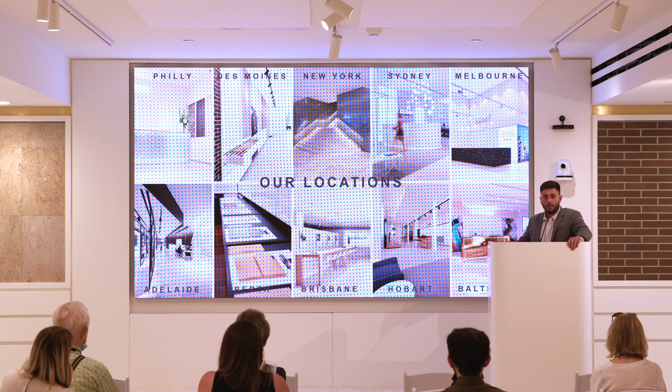We have 10 design studios across the world, 4 in the United States and 6 in Australia. Philly, Des Moines, New York, Sydney, Melbourne, Adelaide, Perth, Brisbane, Hobart, and Baltimore are the 10 that we have currently across the world, and New York Design Studio is the flagship studio of the world.

So a little bit about the New York Design Studio. This is the global flagship, as I said before. It's 16,000 square feet across 3 floors. As you could see when you first walk in, we have over 10,000 glass bricks, imported from Venice, Italy.

The first floor is for event space, and there's also some chips. You might have seen the drawers over there, so a lot of our products that we have on display, we carry chips as well for architects to take with them for future references for their projects.

The second floor, which we're on now, is another showroom, and it's used for bigger event spaces, something like this. We had our grand opening in March, with over 300 guests, so we can hold over 500 between all 3 floors in the studio.

We host over 300 events per year in our design studios annually. These include architectural speaker series, they include lunch and learns. We have a lot of talks where we have architects come here, similar today with Ed Lippman, where they talk about where they get inspiration for their projects and the insights they have for future ones as well. So we love to host events here.

We have 2 bars in this studio alone. We do a lot of drinking. We have a great time here in the studio. We learn about brick, so a lot of events here in the studio annually.

We have over 700 products here on 5th Ave, including products from 10 US plants. We also import brick from Italy, Germany, Australia, and other countries as well. So we do have all of our products here on display in the drawers behind me and to my left. Please feel free to take a look inside those drawers and see what we got going on over here.

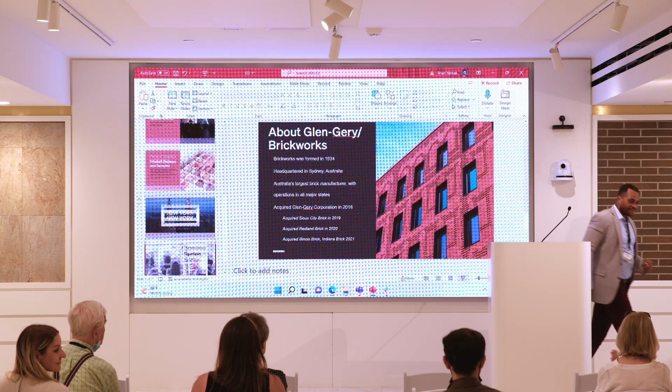Thanks very much, JP. It's very nice to be here, to be invited by Brickworks to come and give a talk in New York. Who wouldn't want to be here? Sydney is a long way from the northern hemisphere and from New York.

And I first came here luckily as a 15-year-old accompanying my mother, which was a great opportunity to experience the scale of a city like this. And that led to my return here after studying at the University of New South Wales in Sydney to get the opportunity to work in Marcel Breuer's office in New York.

As I was saying earlier, at that time in 1979, architects were becoming very preoccupied with postmodernism, a reversion to historicism. Modern architecture was not the fashion of the day. So when I returned to Australia, I was very much out of step with the prevailing sentiment. But I looked for a contemporary modern architecture, something that would inform my approach to design, and I discovered that as a 21-year-old on Madison Avenue, up the street from here.

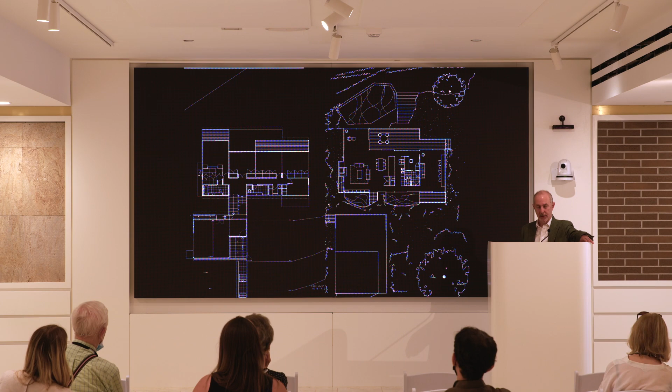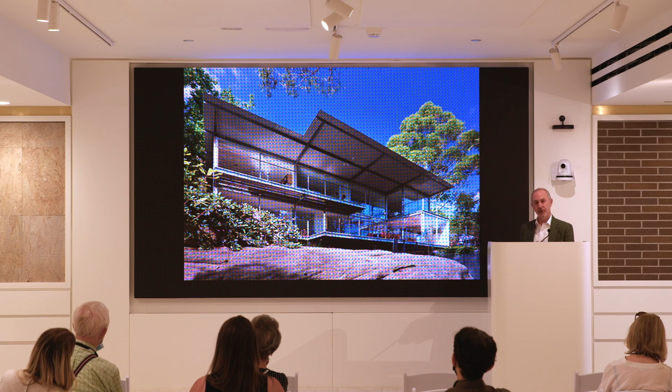Tristram Carfrae is a well-known structural engineer who designed things like the Water Cube. He's currently refurbishing and rebuilding Gaudi's church in Barcelona. But this was his house in Sydney, and as you can see, it's in the national park, facing north, the sunny aspect, a building that reaches out into the landscape. There's a casual quality to these kinds of houses - they look to the north.

The views are to the north. The landscape is natural, indigenous. The landscape designer employed on this project is well known in Australia for harnessing indigenous planting and natural vegetation. So although this house is not far from the centre of Sydney, it has a quality of being very much part of the natural environment.

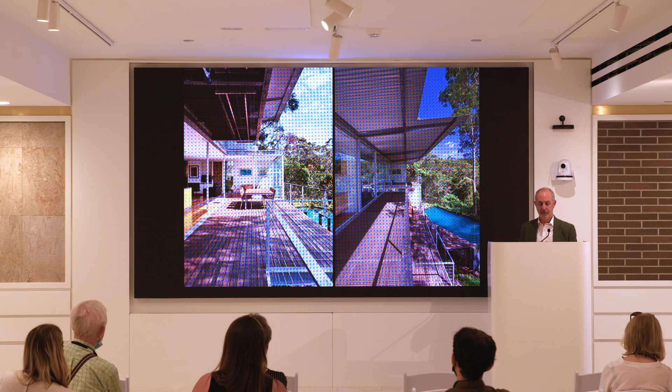Working in the city, though, is a very different thing. Sydney is blessed with a wonderful natural environment, thankfully, because arguably the built environment hasn't been as complementary to its setting as it could be.

There were also some quite eccentric clients roaming around Sydney with a certain degree of affluence. This was a project commissioned by one of these property developers, a Chinese businessman who told me he wanted a house with no corners, no straight lines, and Chinese feng shui, the belief that energy needs to flow through a space and not be trapped.

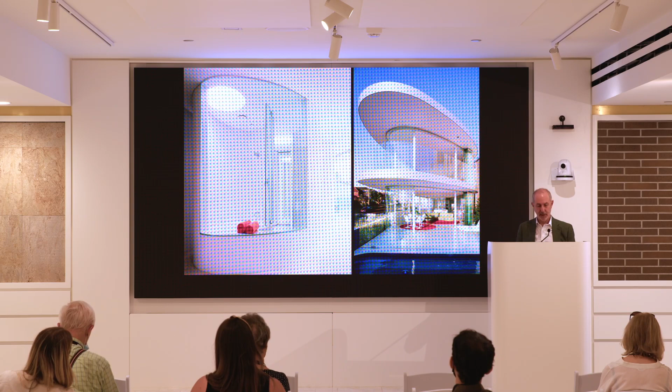It's concrete, so it has more thermal mass than the other projects, but it's a steel frame, and the glazing is positioned to allow views to the west, sun and warmth from the north, and also a natural ventilation system which allows cool air to rise up through the building and out through the roof terrace. You can see at the top of the stair there's a louvered venturi that allows hot air to escape.

So there was a history of residential architecture. By this stage, I was commissioned to do some more public work, and I guess working at a different scale provided greater opportunities.

This is a site very close to the Harbour Bridge in the oldest part of Sydney, known as the Rocks, the most historic part of Sydney, full of sandstone terrace houses. This project, a community centre, sits on a very narrow sliver of space abutting the expressway which leads to the Harbour Bridge.

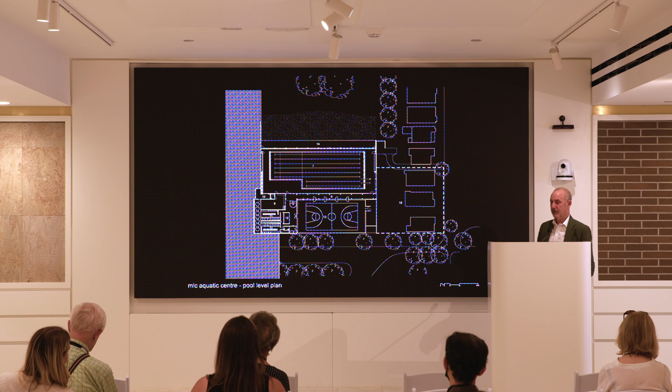Their brief was that they wanted a water polo pool and a learn-to-swim pool, two separate swimming pools, but what we did was combine the two pools into a single body of water: a 33-metre pool plus a 15-metre pool. We created a 50-metre pool which did both, and that was a very good investment for this school. You can see that the school encompasses architecture which goes back many years.

European settlement in Australia is not as old as it is in other parts of the world, but this school's about 120 years old, and we thought that the prospect of adding new building stock needed to respect the old. So we established certain rules about how the new related to the old, and there's no problem with new architecture, but there should be some relationship between older buildings and newer buildings.

Often that's to do with vistas between them, not blocking views between old and new buildings, and the relationship between the siting of the old and the new.

Once again, the opportunity of natural light and natural ventilation was extracted to the fullest. You can see that the building is open to the north, which is the sunny side in the southern hemisphere, and sun comes in from there. It can bounce off light-coloured surfaces, so the building doesn't need to be artificially lit. Also, cool air at low level, rising, and extracting hot air can be employed.

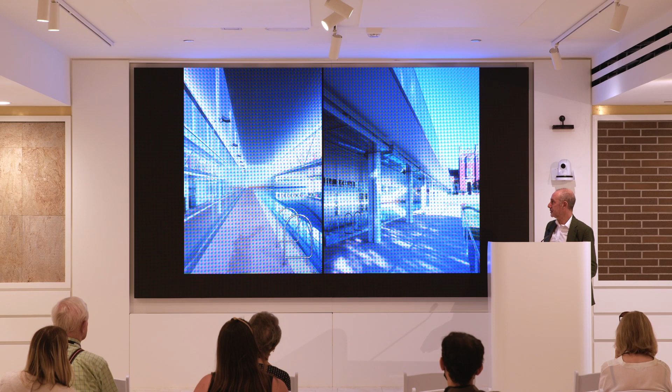So from there, there was other work to do at this school, and I'm sure the situation in America is very much the same, but in Sydney in particular, which we'll talk about later as a global city, there's a huge pressure on private schools to provide better facilities and more innovative facilities.

So we had a client here who was a very forward-thinking school principal, and she sent me to a place called Reggio Emilia, which is in northern Italy, where we started to understand how children learn and the whole philosophy of educating young minds to think.

Although this is common parlance in educational circles, there are very few school principals who would actually entertain the idea of an open plan environment. We looked at the work of Richard Neutra, who had done similar things in California, the Corona School in California, but she wanted to build a school where there were no walls separating children.

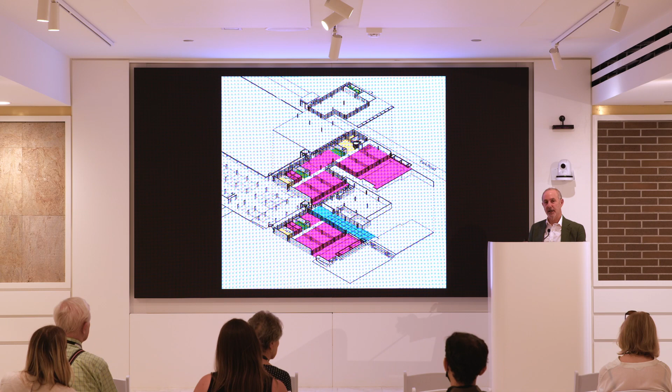And the concept of classrooms, we changed the word classroom to studio. Her management board were quite concerned about that, but we created rooms that could be subdivided if they had to be, or they haven't had to be, but learning spaces which look to the outside of the building, as well as outdoor learning spaces where children could lie under a tree with laptops and learn in a natural setting.

Then this is a sketch of the other idea, of course, that schools are miniature cities. They're cities for small people. And there's what we call a piazza in the middle of the building, which provides space for outdoor learning.

It's a place where people who arrive can congregate and have a coffee, parents who drop their children off. And then there are smaller spaces and more intimate spaces. This idea of different scales within a building is very important for children because it provides them with an introduction to what the world outside is like. There's a lot of learning that takes place outside, not inside.

There are different opportunities that exist for internal spaces, but this idea of seamlessness means this facade can be completely opened up so that the internal space can become external space. And most times of the year, in that climate, that's quite possible to do.

It's a 3-storey building, so there's a car park at the ground level and vertical circulation, and what became a theme of the practice is to make that a delightful experience. Moving up and down a building, moving horizontally and vertically through it, becomes something enjoyable.

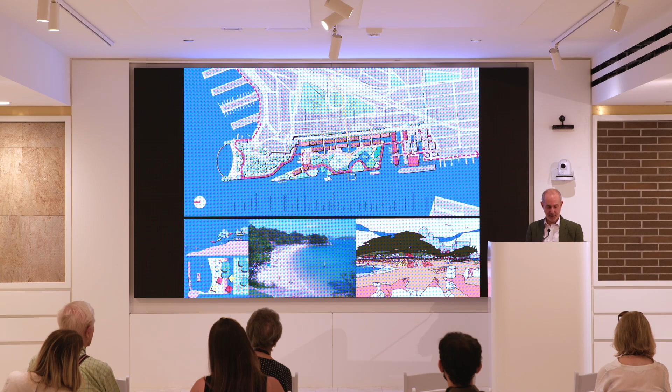So Sydney still is, even though the population is expanding and the density is increasing, very much an outdoor city where lifestyle is very important. So it might seem funny, but you can see the guy on the bottom right lying there with what we call a tinny of beer. Not all that sporty as Australians are supposed to be, but he's enjoying the beach and having a beer. The beach in the centre there is exactly the same scale as what we were proposing, but this was quite unique because this was a beach in the city, and that's not common. But we thought it was very plausible, not just for tourists, but also for people who live in the area and for people who work in the area.

So this too was somewhat controversial. We didn't win this, we came second, which was controversial, and I think on reflection one of the reasons we didn't win was because we had team members from America, from England. We had a developer on board, Lend-Lease, and the team who won the competition were friends of mine, a group of Australian architects, and we lost to them, which was controversial at the time, but led to a situation where the whole competition process was eventually abandoned. In the end the government decided to sell the site, which was sold to the developer who we worked with originally as a competition with Richard Rogers' office in London. And the principles of what has now been built were very much established by this scheme.

You can see on the bottom left what was very important was the idea of sustainable building. So it wasn't just developing the site in a way which was sustainable, but also the orientation to sunlight, to rainwater reuse, growing food on the site, using fresh air to ventilate buildings that can breathe and be healthy for people to live in.

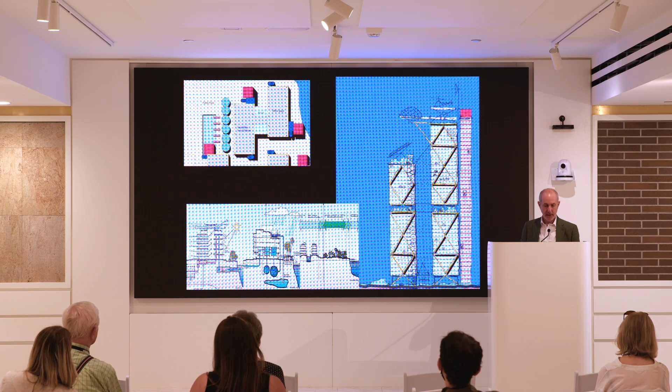This led to the publishing of a book, which I've got here tonight if you want to take one, which started to look at the morphology of Sydney as a city, where it's going, and what the shape of the city will be in the future. So we've now hit 5 million people.

And the issue in Australia, or in Sydney in particular, is big cities have opportunities. There's vibrance, there's connectivity, there's obviously opportunities in large cities that smaller towns don't have in terms of education, in terms of business, and in terms of interaction with other people. But the question of whether the city is becoming a better place to live, a more enjoyable city to live in, is front of mind.

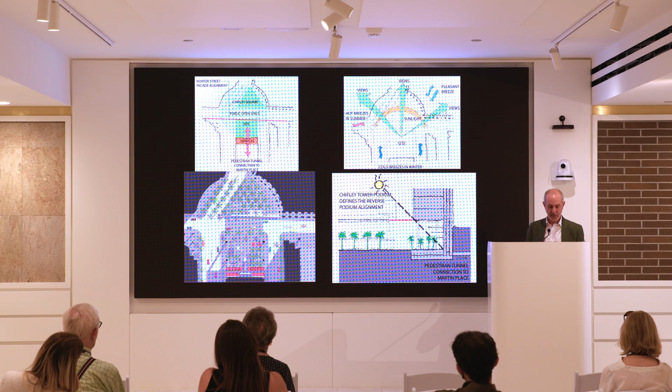You can see the sunshine and the views out upstairs on the upper levels are available. By raising the building up in the air, we also provided the opportunity for views, and we are a bit obsessed with views in Sydney especially, harbour views in particular. By elevating the first commercial floor some 20 metres in the air, it meant the building could be higher and get better views.

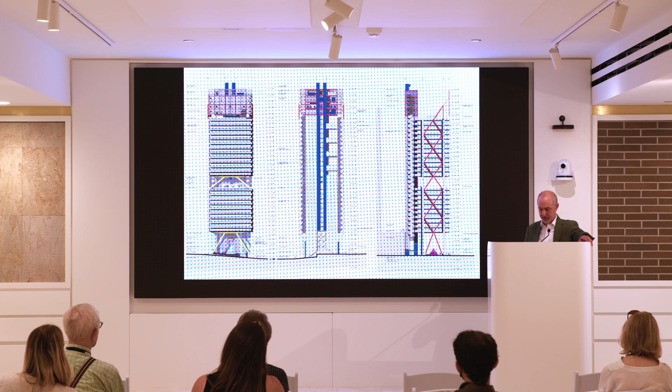At street level, we were trying to create a vibrant environment for buskers, for people to sit on the stairs at lunchtime, very much a place for people. And the expression of the tower also reflects that structural system.

Inside the building, we wanted these office spaces to be as flexible as possible. Every third floor is a full floor, and the 2 interstitial levels in between those full floor plates were mezzanines, which could be adapted to different tenant requirements, different businesses, different companies. This is an area of Sydney with a lot of legal firms and commercial institutions, and they have different requirements, so we wanted to create a space where...

...the concept of individual offices pretty much didn't exist. People could interact with one another and see down and through the building. You can see from these preliminary sketches.

This project was also done in collaboration with Richard Rogers' office in London, and we probably wouldn't have had the opportunity of doing this project without them. We brought them into the project when this was another competition, a design excellence competition, and they collaborated with us in that.

You can see that the environment inside these office spaces is what we call very democratic. The experience after the project was finished was that companies attracted to the building, even large legal firms, changed their whole modus operandi and gave up the idea of individual private offices for hot desking or open plan office space. They have separate meeting rooms, but not individual offices, even for partners of law firms.

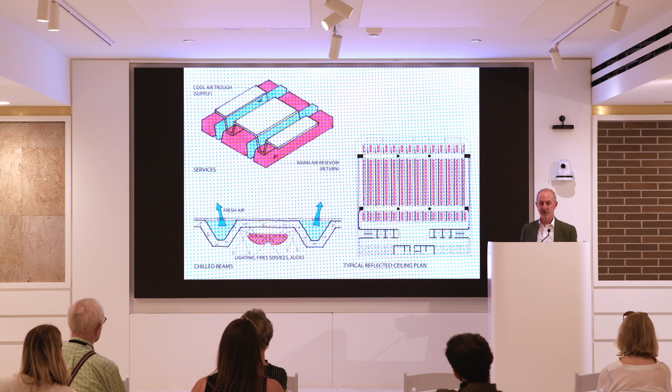These were some of the ideas of how you would incorporate air conditioning and lighting into the structure of the building. These are all ideas that Arup, Rogers and my practice have been exploring for many years, the full integration of building services, structure and construction.

How do you deal with the environment, the sun, glare, without relying on heavily tinted glazing or high-performance glass? The glass in this building is pretty much clear, but it's shaded externally, and the external shading also provides a platform for glass cleaners to attend to the exterior of the building.

So it's not a sheer glass curtain wall box, but one that responds to its environment. The roof terraces, you can see at mid-level, halfway up the building and also on top, are accessible, and by using windscreens judiciously placed, they become quite usable spaces. We found that a lot of people working in the building were using these roof terraces to conduct business, have meetings, have lunch, meet with one another. The views from up there are pretty spectacular, but they're also just very pleasant spaces to be in.

Constructing a building like this was very interesting for us. Coming from my experience with Breuer and this Bauhaus idea of prefabrication, I think today we're building buildings all over the world which are manufactured from parts that come from all other parts of the globe. The steel was from China, the curtain wall came from Thailand, some of the glass came from Germany, and all that was happening really was assembling on the site in Sydney. Of course there are some issues with that, because sometimes the tolerances aren't quite right and things don't fit together as well as they could, but we're getting pretty good at that these days.

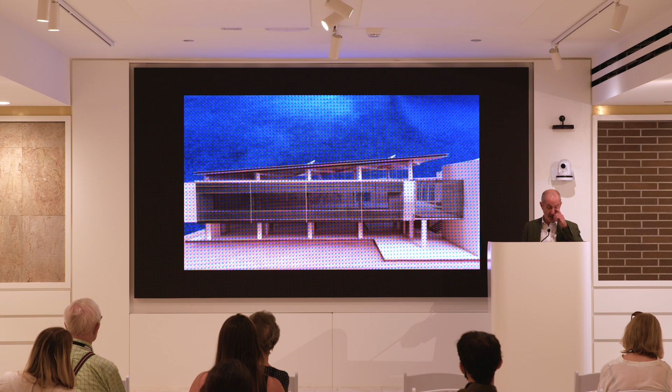Clearly the two buildings are of a different era, different materials, different architectural expression, but they do work together. While the heritage listed building on the left I describe as the granddaddy, hopefully in time the one on the right may also be considered to be of historic merit. You can see that it's a lightweight roof with glass around the perimeter, allowing natural light and air to come through, on a masonry base of concrete.

Once again, these themes of natural ventilation and natural illumination are at work here, and I think provide a very good environment for people to be in. Of course, a building like this with 1,000 people, which is also used for other purposes besides a religious sanctuary—it's used as a communal space for other organisations—has to be air conditioned and provide AV performance requirements. So there's a lot of technology in the building, however, we're not relying on it. The way that this building is constructed was also very important.

Single span building sits on triangulated columns. We found that the structure was designed for maximum efficiency, but in the process of developing that structure, we also found that the iconography of the Star of David started to intrude into the actual structure of the building, and you'll see that in a minute.

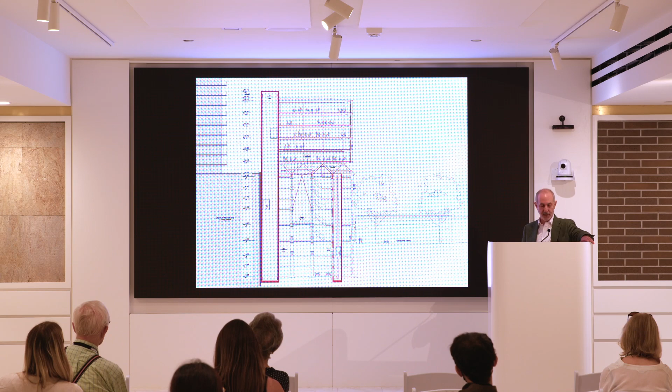You can see the old building is the lower 5 stories. There's a new lift shaft and a box on top, essentially glass, which had to sit on the structural grid of the existing building. So there was a triangulated steel structure, much like the first project I showed you, the house, where the loads are transferred back onto the existing building structure, and a lot of work has to be done to the old part to make it structurally sound. On top of that sits this new commercial space, which will create the revenue to keep the building alive.

There are studies indicating how the old fabric can be retained. Some of it can't be, some of it's surgical, but parts of the old building have to be modified. In the end, this is a concept, really, not detailed design, but we had some difficulty with the heritage lobby in getting this approved. We argued it was respectful to the old building because it's clearly separated, but it's on Macquarie Street in Sydney, which has a long history, and we're still arguing the case.